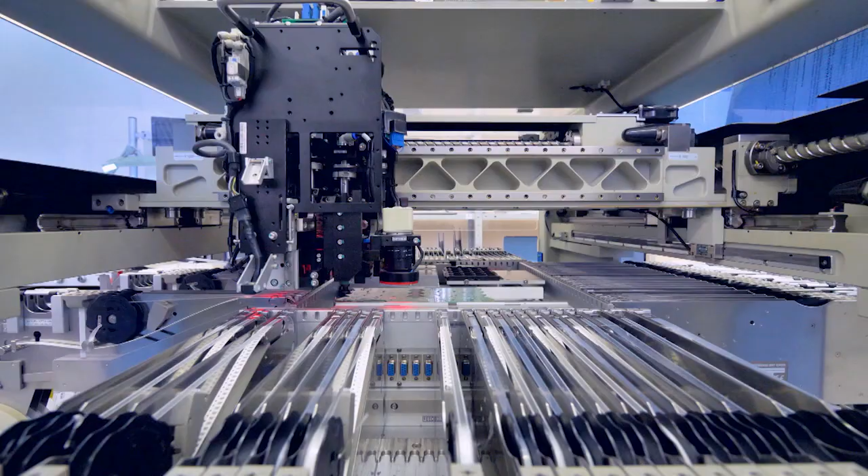Air compressors are those invisible things that you probably don't realize are in every walk of life, whether it's how we fill sodas into bottles, how we move and convey parts in factories and plants, how buildings are painted. It is truly a fourth utility. Most people think about electric and gas, but air is another utility just as vital in production processes, whether in pharmaceuticals, in food, putting chips in bags, or in industrial environments like we work in here at Sullair, building products for other companies.

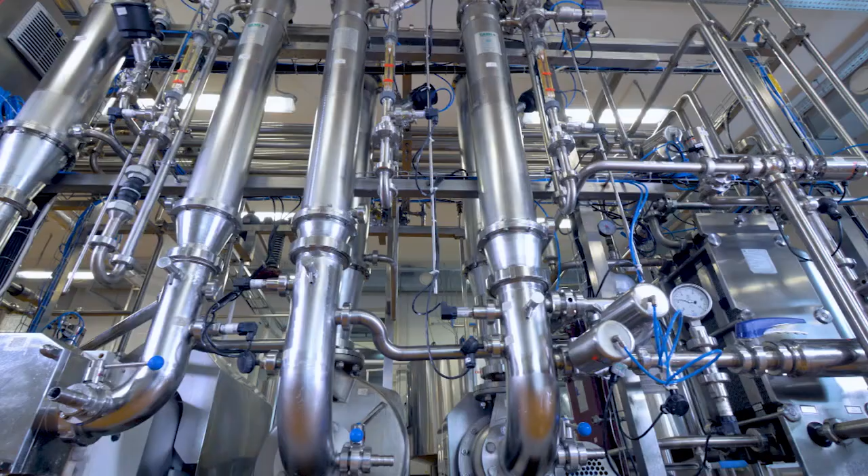In a factory, on a job site, or anywhere in need of clean air, there's a reason Sullair has been the leading edge of compressed air solutions for over 50 years. Been around for 53 years, since 1965. We make compressors, industrial compressors, both portable and stationary.

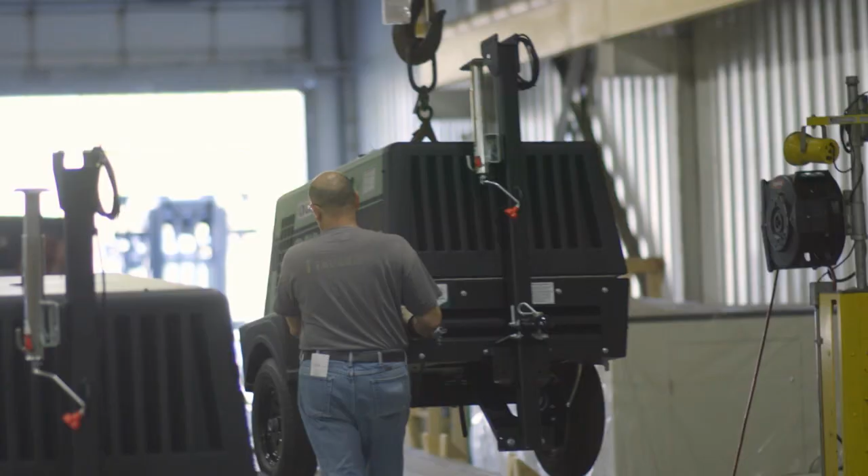We go beyond compressors. We make ancillary or tertiary products that complement the total solution package for compressed air for industrial and many other types of customers.

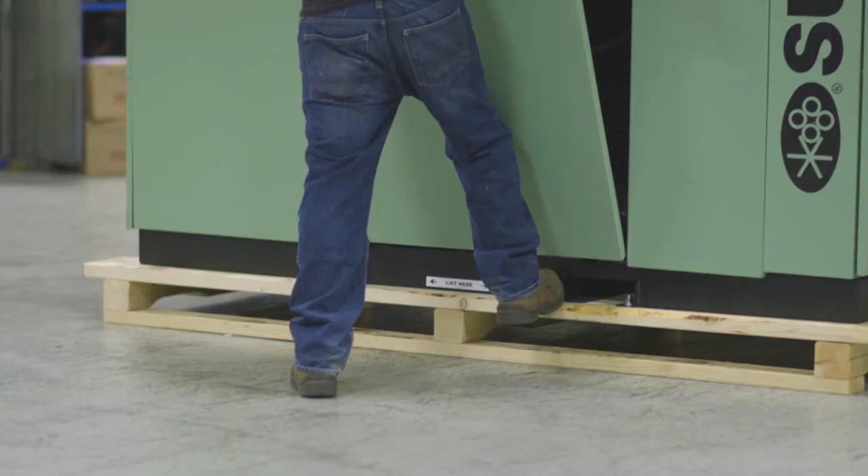Sullair, to be real honest, was for the past 8 to 10 years somewhat in a holding pattern, with uncertainty in terms of what the future might be. Throughout the industry, Sullair has commonly been known as being like your father's Oldsmobile. While renowned for its durability, it's no question Sullair was often seen as outdated manufacturers. That was until the acquisition by Hitachi in 2017.

I was actually on the team for this acquisition on the Hitachi side, and after the acquisition I was told that I was going to lead that business now. So we are thinking about how we can bring Hitachi's culture or Hitachi's strength into Sullair to bring this business into an even better direction.

Not only did we get a partner in Hitachi as an owner, but we got a great partner. Hitachi has come in, they're committed to this business. They are very strong in their own right in Japan. They are committing resources, technology. They have products we don't have in technology, we have some they don't have. But the commitment at the very top of Hitachi couldn't be stronger.

My goal for Sullair is - we actually just merged together and are still in the stage of bringing the best culture from each other right now. But the goal is that I want to, and I think both Hitachi and Sullair want to, become the number one player in the world, not just the USA, not just North America, or not just Japan. With the technology we bring into Sullair and Sullair's basic structure and strength we already have here, we can make it the number one company in the world.

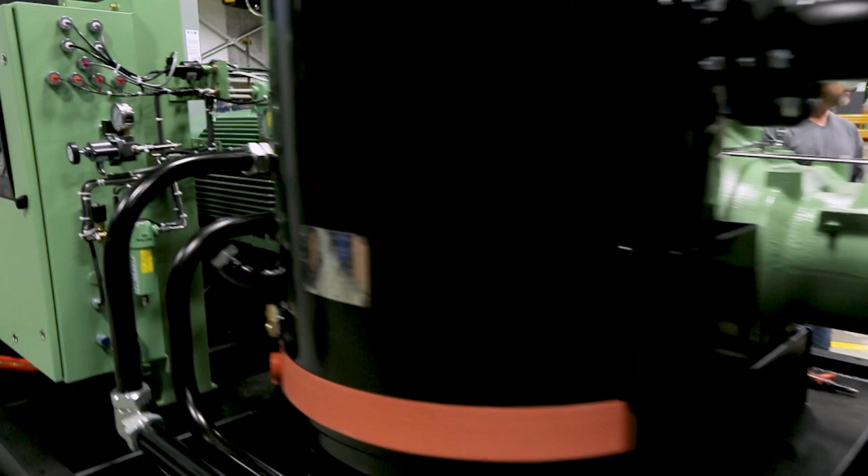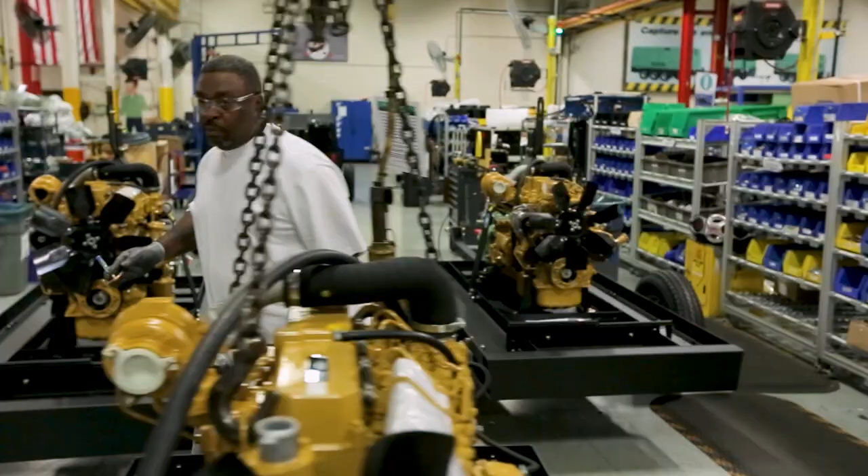Sullair is rapidly innovating due to the company's acquisition by Hitachi in 2017. From an engineering standpoint, since Sullair has been acquired by Hitachi, it's been like a new kid with a new set of tools, or a new toolbox. I've been able to look at not only the mathematical tools that Hitachi uses to compare and contrast, and then use the best of all the technologies to help further our development of new products.

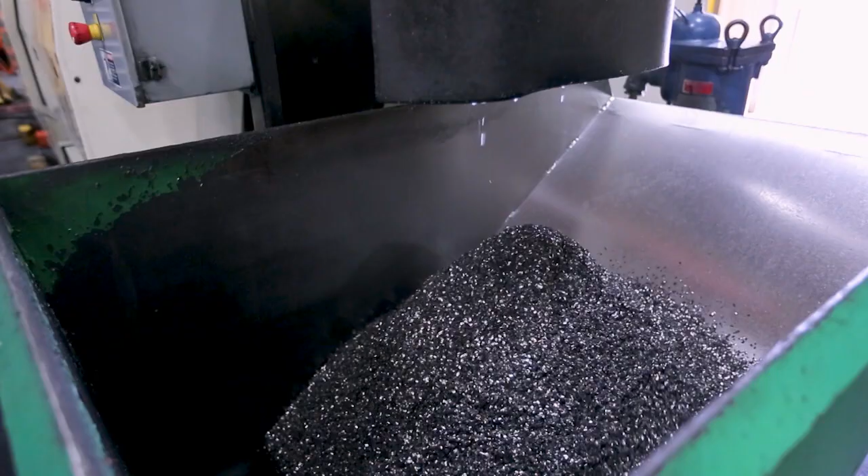We have access to Hitachi's leadership development programs for our employees, so we're starting to consider ways to send our employees through those programs.

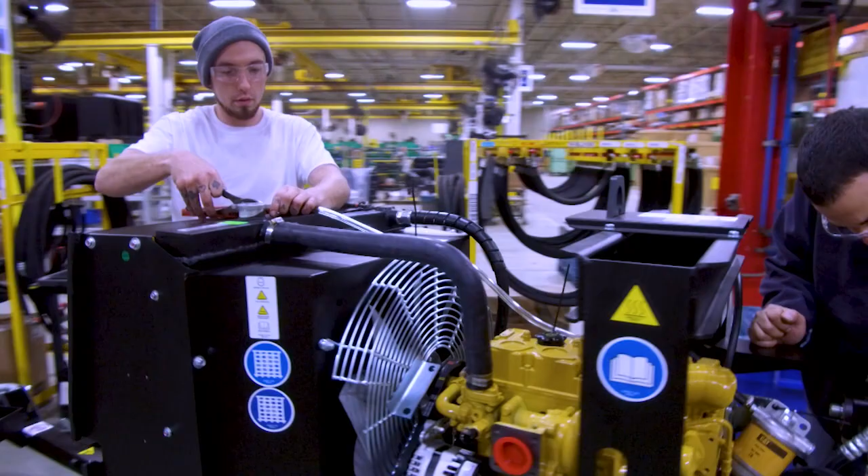Sullair is showing us why they're far from being old school, with their compressors at the heart of most manufacturing and industrial applications. Sullair air compressors are known for their durability and reliability. We have, and I have seen, compressors in customer sites that are over 30 years old. As long as they are well maintained and continued to be kept up well, they will last.

That is a hallmark that, from a development standpoint, we've ensured we have kept with all new products. So as we've brought out and maintained the DNA of Sullair, we've improved in other areas, such as the operator interface and performance aspects of how our compressors work.

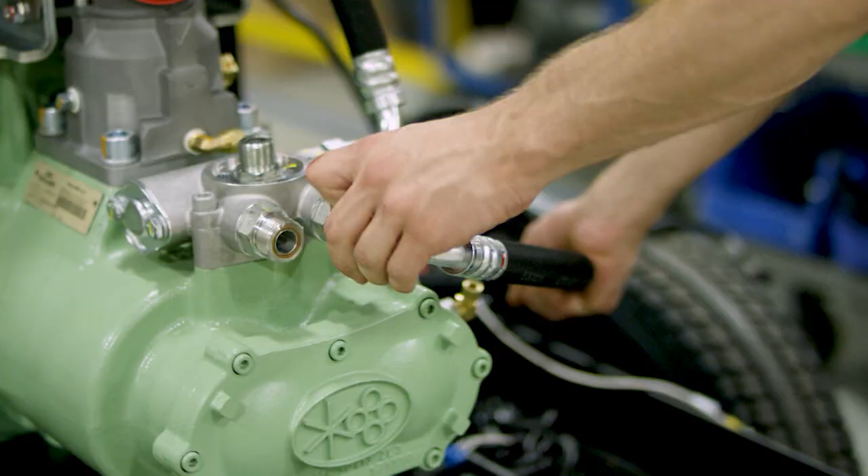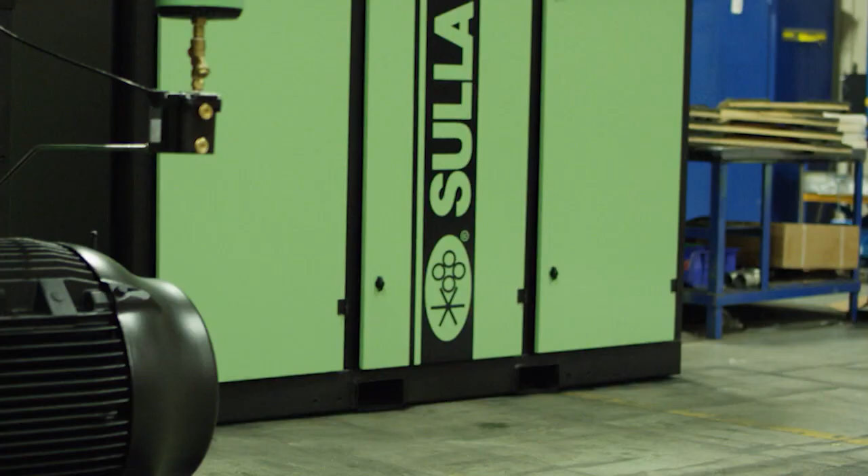Our mantra at Sullair is pretty simple. We pride ourselves on being reliable in terms of the products that we manufacture, durable, and providing very high-performance products as well, so that we can help industrial companies excel and do the jobs that they intend to do.

The resources they give us—there are over 300,000 people at Hitachi. I kind of feel like I've met all of them at some point in time, but there's a tremendous amount of resource that we didn't have, quite frankly. And the people themselves, I probably should have led with that.

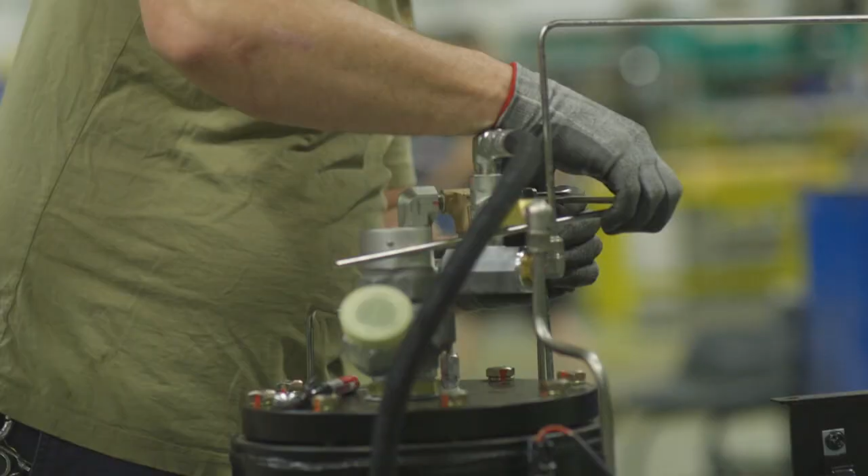The people at Hitachi are very genuine. They care, they want to help. So are Sullair. So it's a match really made in heaven, because there's just a tremendous amount of synergy and respect going both ways. And we try to help one another, even though we're small compared to Hitachi. Most companies are. We try to give back to Hitachi as well, but it's been a fantastic marriage. And the word I use is it's given Sullair a home.

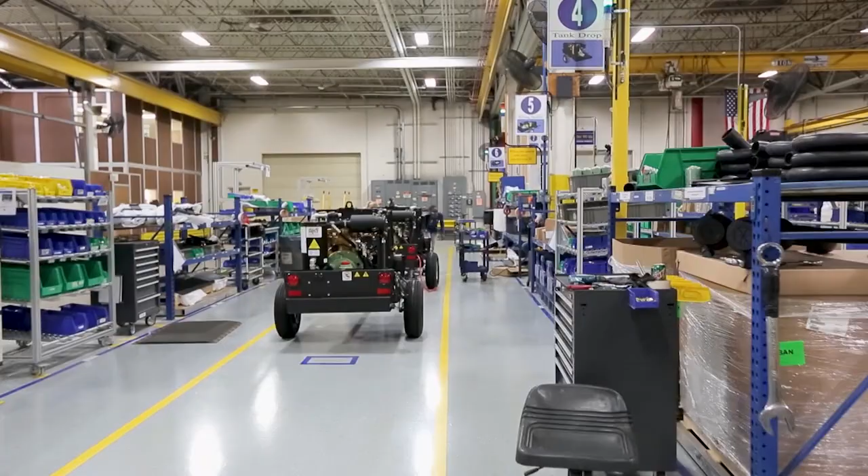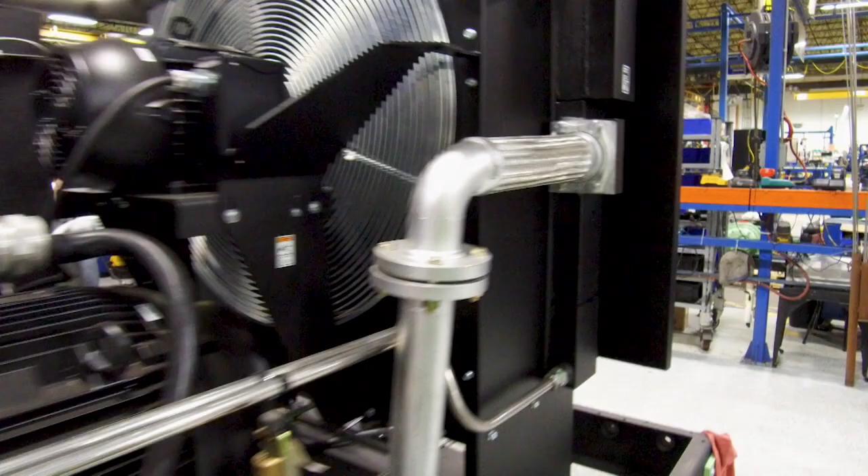In 2018, Sullair introduced and expanded two new major lines for both their stationary and portable air compressors. The biggest aspects we've been focusing on from a technology development standpoint are new air ends for our products. They are basically the heart of the compressor. They are what we are known for in terms of durability and reliability, and what we have done is improve that, making them the most efficient air ends in the market.

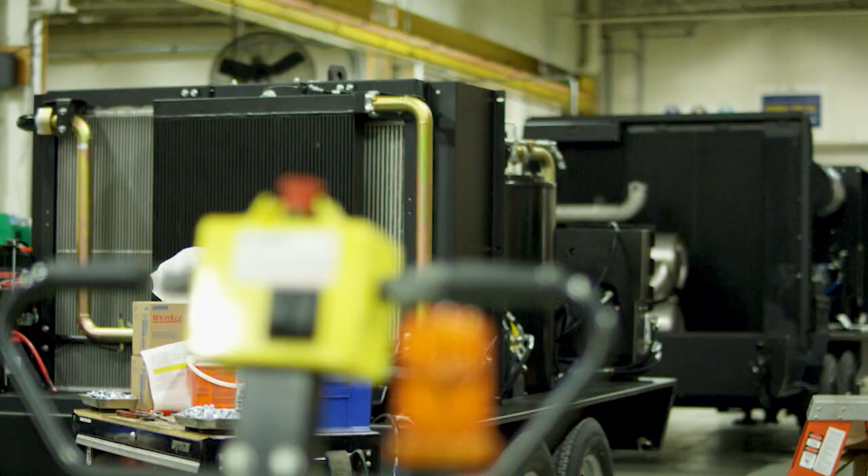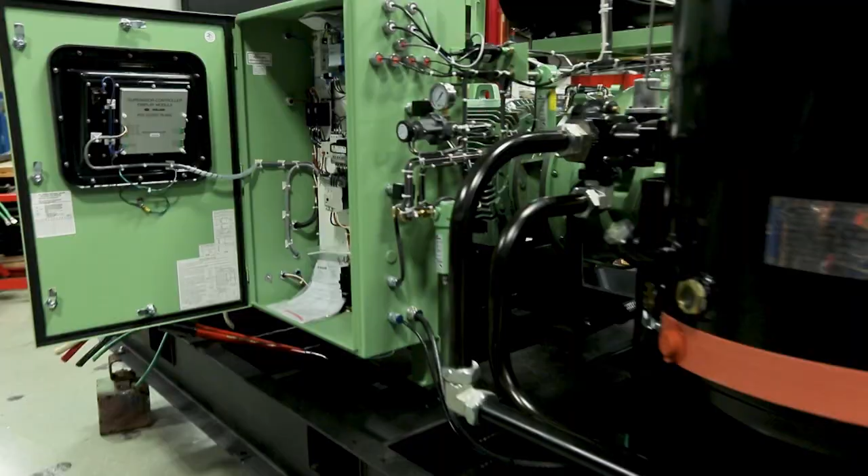Our new LS series product is the first all-new product launched in almost a decade. It has truly changed the perspective of Sullair from being a very traditional, old-school type product to putting us on the leading edge with new technology, allowing our products to lead in the market—continuing to find new ways to advance and incorporate innovative features at a rapid pace for a reliable and sustainable performance.

Sullair's product is known for reliability, durability, and performance. Famous throughout the world for their legendary durable products, Sullair has been on top of innovating air solutions year after year.

There's going to be growth here. We've added over a couple hundred people just this past year, and I think we could be stronger than we are today, and we're pretty strong now. But we have a balance between the little bit of catch-up that we're still doing—we're almost there—and growth, which we are accelerating at a record pace right now. And we're going to continue to do that for many years to come.

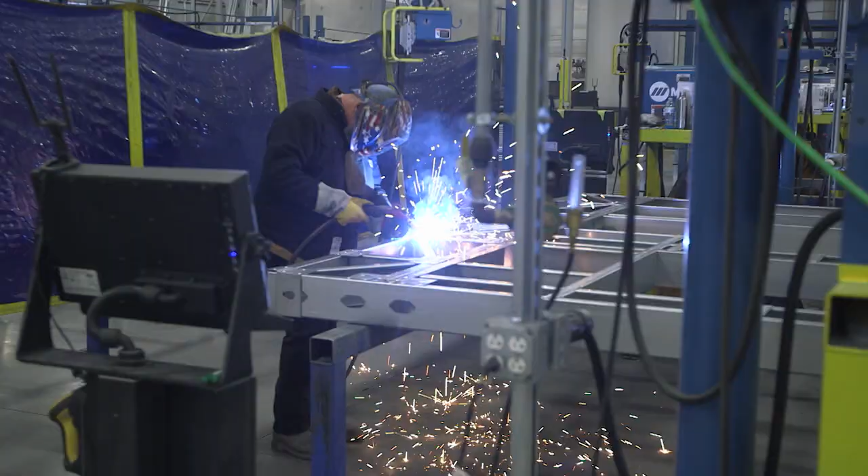On this episode of Inside the Blueprint, we're going to Durham, North Carolina to visit the facilities of Prescient. We're revealing new technology being used in the construction of multi-unit residential buildings.

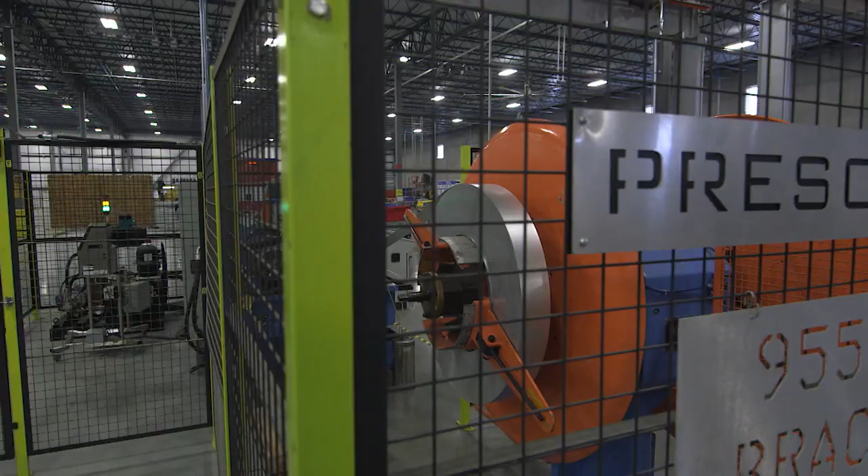Prescient was started with a very small facility—it was a 6,000-square-foot garage. Today, when you put that in perspective, we have two manufacturing plants, each 130,000 square feet. What's most exciting about our company is that we're in a $10 trillion industry that is ripe for disruption. We built an end-to-end platform, which is a proprietary system, both software and hardware, that really solves all of the bane of construction.

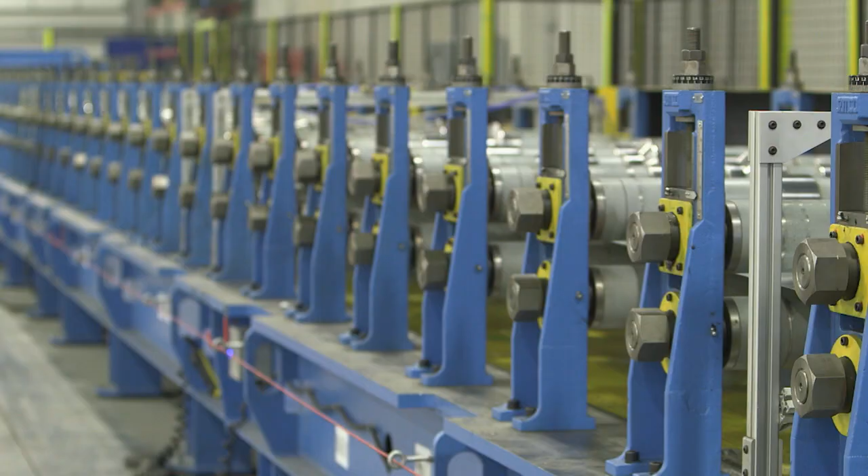Prescient is using state-of-the-art technology and advanced manufacturing methods to revolutionize the way multifamily residences are planned, designed, and built. Here we actually produce all of the different elements of our UTSCS system—posts, panels, trusses, and our metal decking system that are produced on site, as well as our stairs, which is our newest product line.

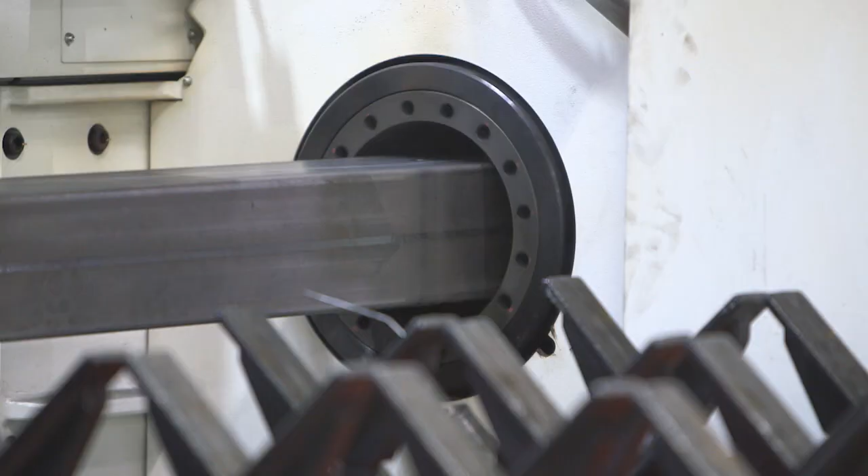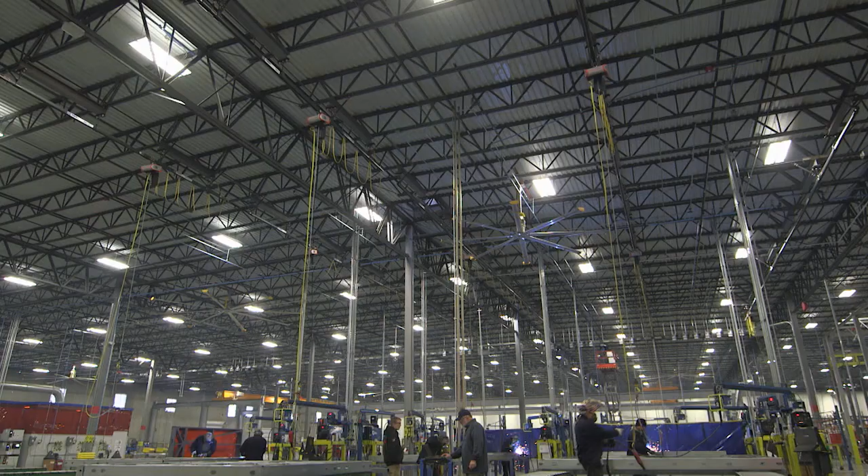The Prescient digital thread is based on a model-centric design and planning platform that liberates project stakeholders to plan better and execute better. As a result of this technology, the process becomes an orderly progression through a repeatable flow. This seamless approach means higher productivity, higher quality, fewer last-minute conflicts on site, less waste, shorter schedules, and a better ROI.

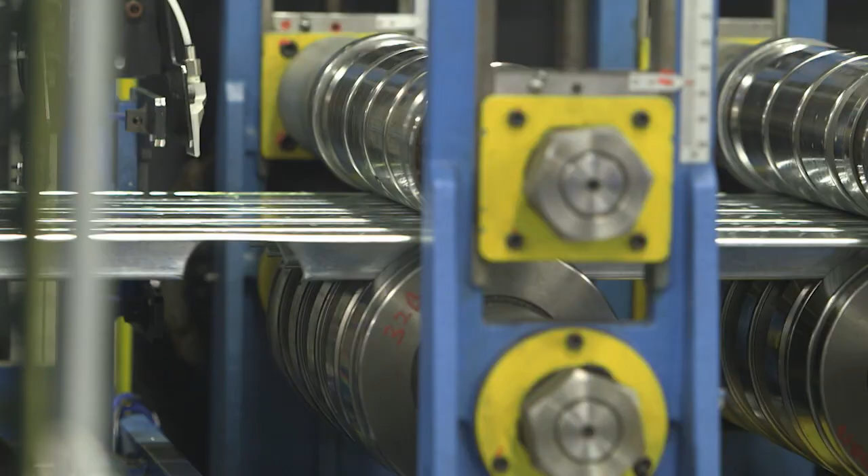For Prescient, the vision is pretty expansive—it's attainable housing for all. Our technology and our product is applicable globally, across all continents. With the increasing thrust towards urbanization, we are the perfect urban infill solution.

One-third of our company is pure software development. One-third of the company is advanced manufacturing. One-third is where the rubber meets the road, where we handle the construction part of it, where we assemble our buildings.

Prescient is a technology and manufacturing company that offers a faster, greener, and more cost-effective alternative to conventional building structures such as apartments, student housing, and hotels. We visit one of the current sites utilizing this technology.

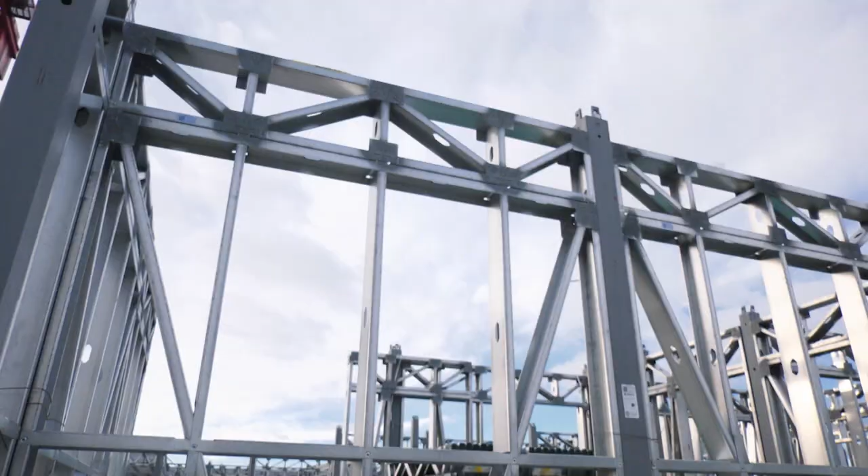We're at the Jefferson View Apartments, a 248-unit apartment project here in Denver. What you see around us is the Prescient framing system, a construction method that allows this project to go a lot higher than wood construction, but it's also a lot more economical and affordable than concrete.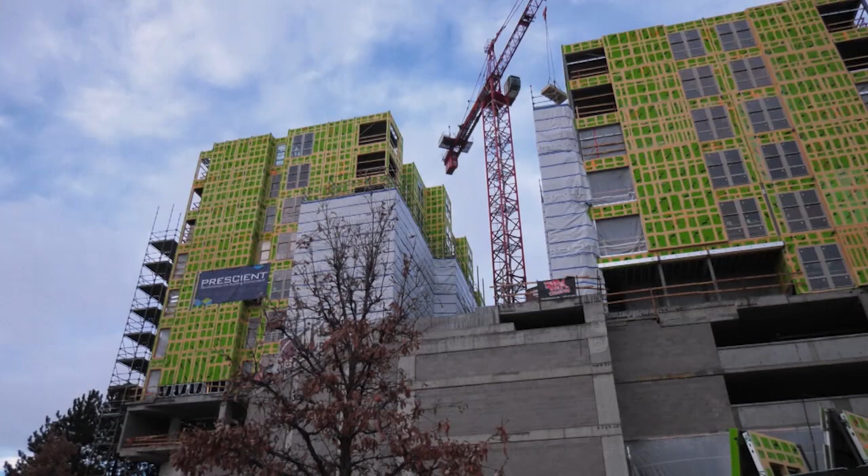This site is less than an acre. In order to get critical mass, we had to go higher than what stick frame allows, which is only 5 stories. So in order to go 12 stories, we needed to go light gauge steel, which is more cost effective than concrete. So Prescient allowed us to do that.

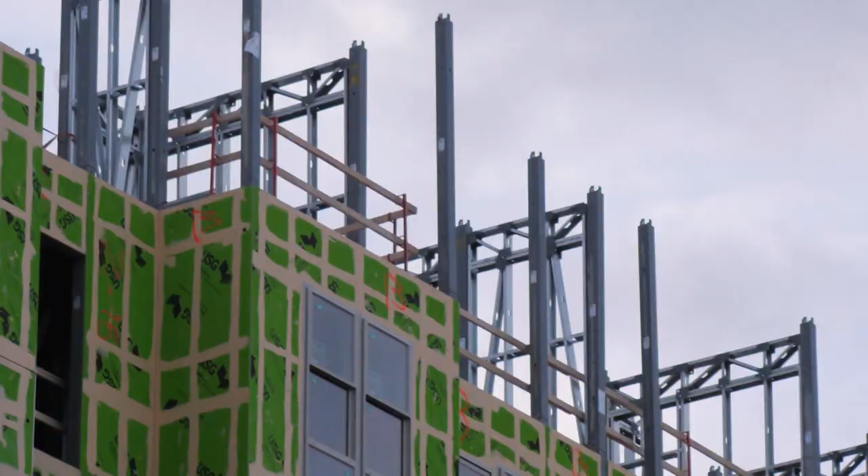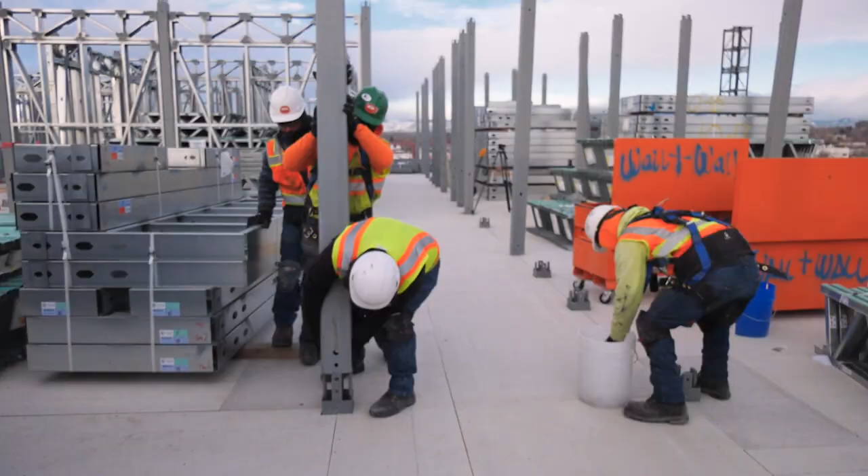In addition, with Prescient, we were able to get several points towards our green designation in order to get a green building certification. And then lastly, the Prescient system allowed us to condense our schedule substantially versus other forms of construction, say concrete or stick frame.

We're building the framing system off-site so that we can speed up the construction that happens on-site. So what happens is we have the ability to move faster to complete the project because of the off-site prefabrication.

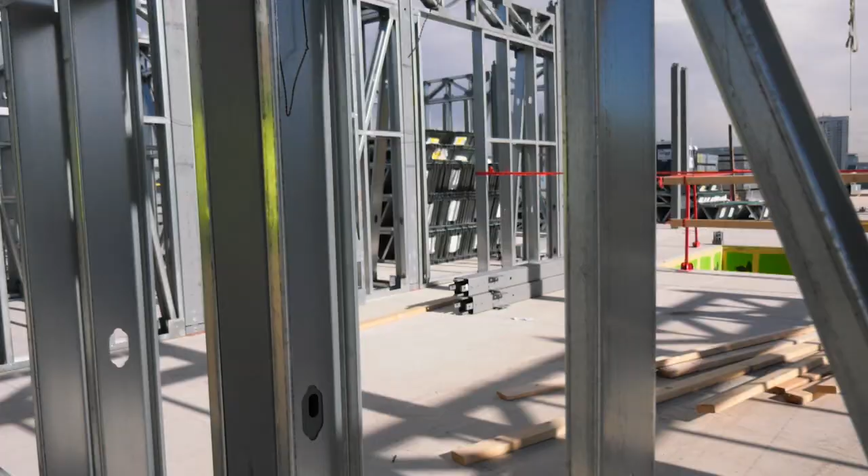The impact of Prescient, in my mind, is that one of the most important things it does is help narrow our carbon footprint. Construction is an industry that gobbles up carbon, and we need to be doing our part to make that better. Prescient and what we're doing here can help a need that's going to affect my grandchildren and their children.

So we're here on the 9th floor of the Prescient system, and what we've done first is install our posts. Each one has its own QR code. When we made this at the factory, we knew exactly where this post was going to go in. We put the posts in first, and then next come the panels, and then the trusses.

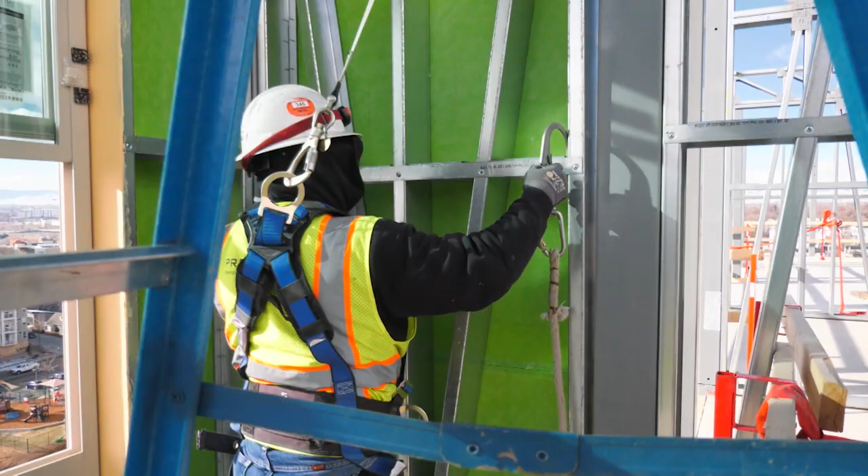What you'll notice is that the panels and the trusses are right next to the posts where they're going to be assembled. They're all barcoded as well, so that assembly happens very fast, and no construction worker ever has to move more than 20 feet from where the inventory is laid.

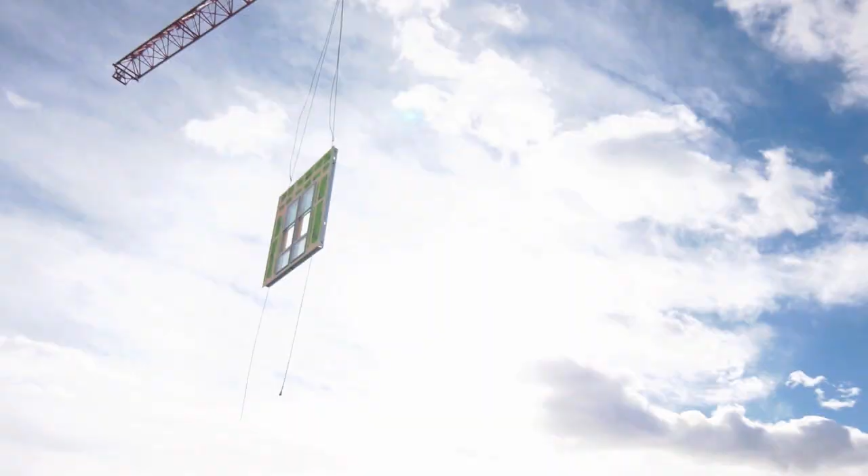The strength, stability, and precision from using these advanced manufacturing methods enables Prescient's digital thread software to provide a singular source of truth for all stakeholders on the project. This comprehensive building solution significantly reduces costs, execution risk, and time from development to completion, providing economic benefits to all constituents in the process.

We'd like to build this thing into a global brand. We'd want people to be able to walk by our buildings and say, that's a Prescient building. We are the guts of the building. We are the only OEM platform in the world today, and we would like to globalize this brand in hundreds of cities around the world.

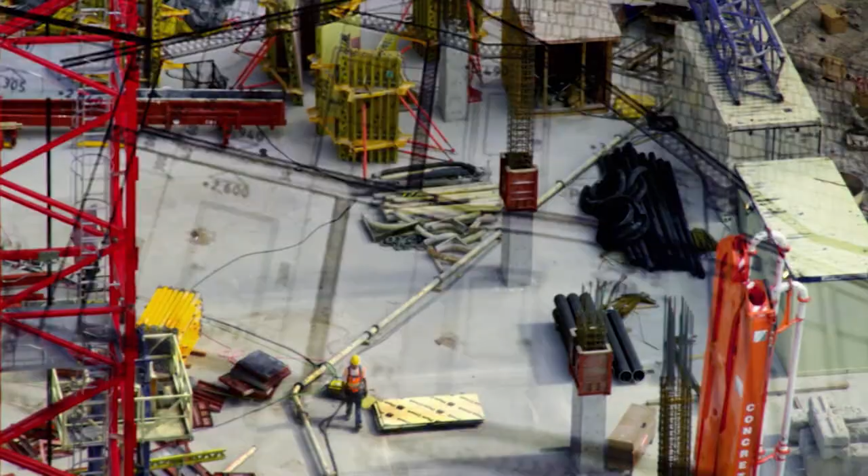We are in Hagerstown, Maryland, visiting the headquarters of JLG Industries, celebrating its 50th anniversary this year. JLG is dedicated to creating a better way to work at height. JLG is the world's leader in the design and manufacture of access equipment. We make all kinds of construction equipment which keep people safe and productive at height.

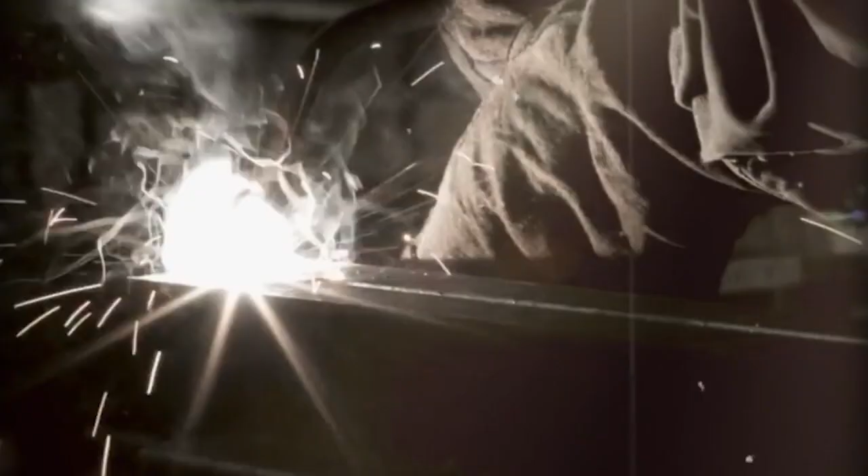Formed in 1969, JLG pioneered the access industry from its early beginnings by manufacturing the first aerial work platform. John L. Grove founded the company in a little mountain community called McConnellsburg in 1969 with just himself and 3 small investors. They would soon transform the construction equipment industry with the introduction of the world's first aerial work platform.

He was passionate about innovation, passionate about keeping people safe, and since then the company has grown to now over 6,000 people. He was all about understanding the unmet needs of the customers.

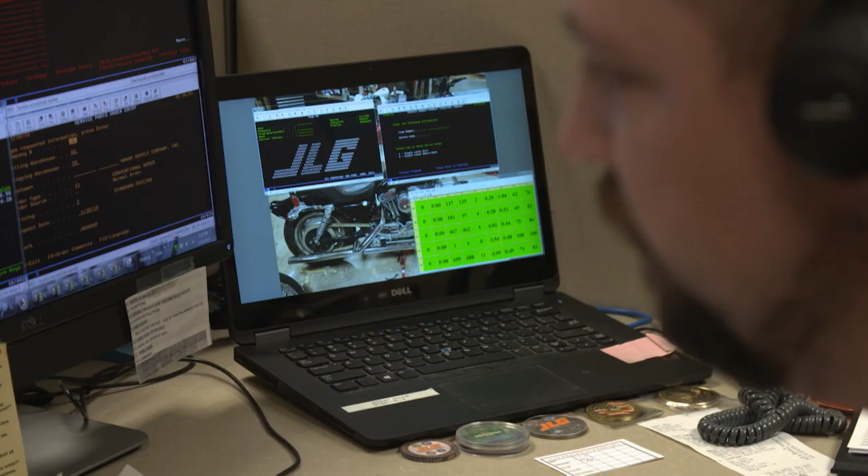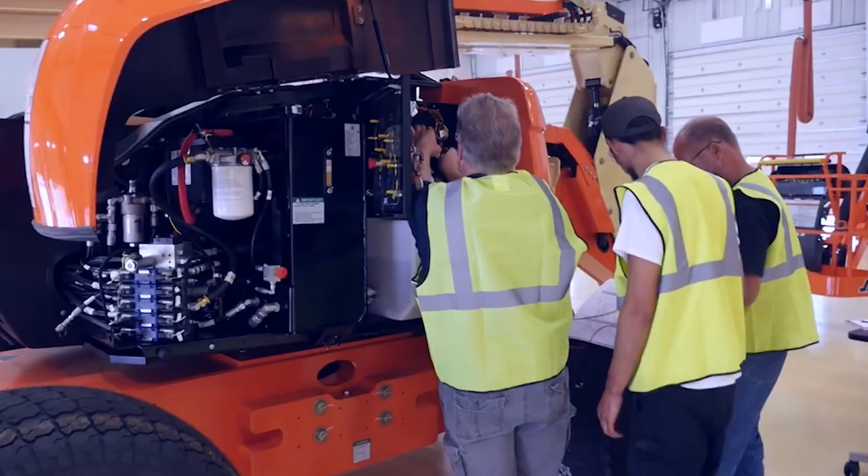One of the secrets of JLG's success is that they focus on customer first and foremost. The customer is at the center of how we think about all problems when it comes to developing products. It's about making sure that they have the right training tools to use the product effectively. So all those things are key to our innovation process, what we again call customer-inspired innovation.

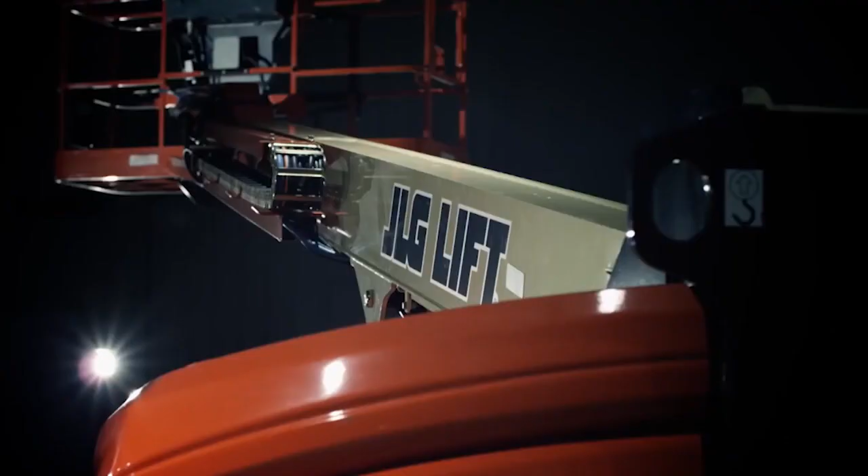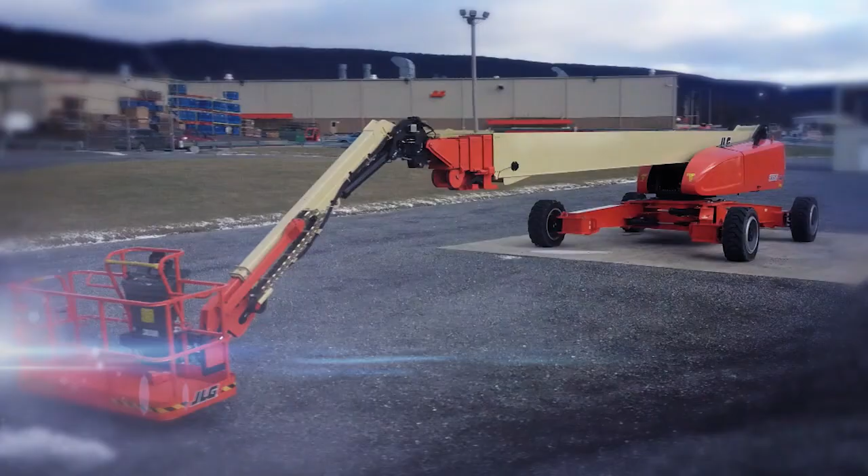We are confident that that's going to allow us to remain number 1 market leader in this space for the next 50 years. A spirit of pioneering that has constantly pushed the boundaries in the access industry. As an example, the 1850 SJ was introduced in 2014 and remains the largest self-propelled boom lift in the world.

We've been first in the industry in aerial work platforms, but that's not all that we do. We now have a full line of electric scissor lifts, hydraulic scissor lifts, telescopic material handlers, and verticals. And most recently, we're introducing a line of low-level access, which we believe will be a safer alternative to the conventional ladder.

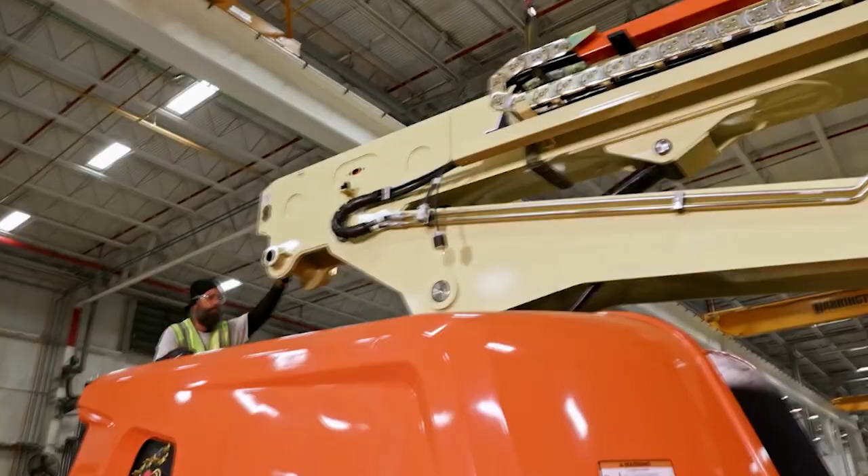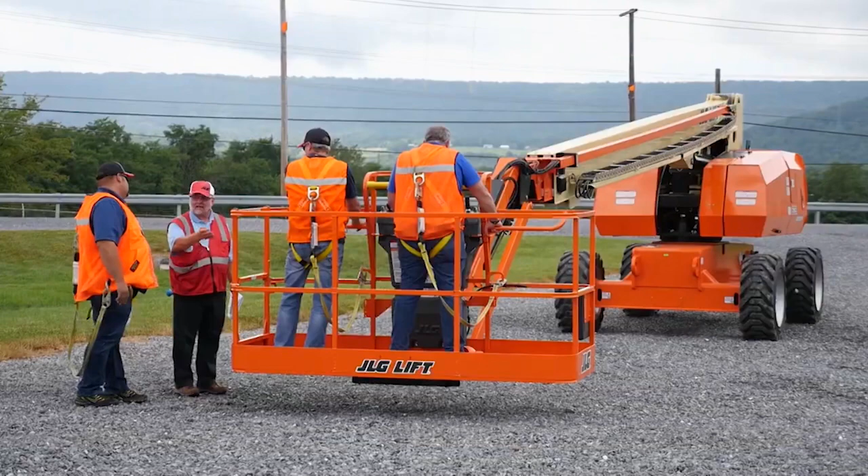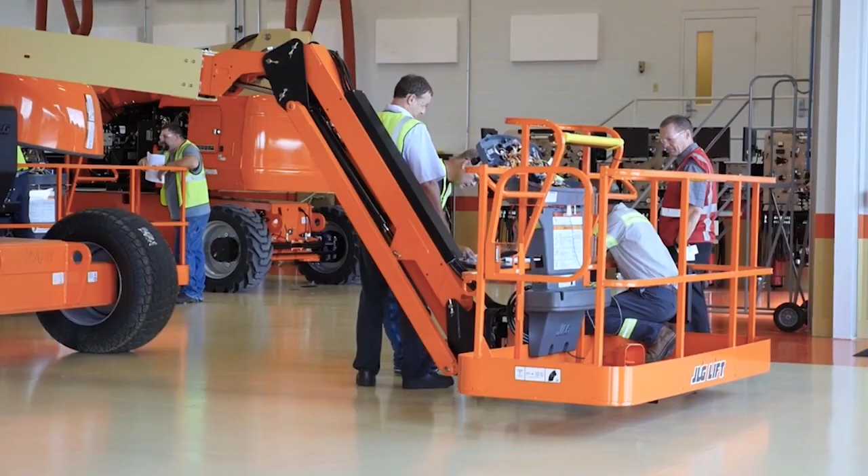We're now in McConnellsburg, Pennsylvania, where JLG University offers training for operators on how the equipment works and how it can keep them safe. We have the operator training, which is train the trainer, and how do we operate the machines. And then the service training is how do any of these machines work. The training center really provides hands-on for those trainers that want to come in.

The more people we can train in this industry by whatever means makes the industry safer and stronger. We offer all kinds of courses online, and increasingly we are offering those courses in a virtual reality or augmented reality setting that allows our operators to learn at their own pace. We were the first of the industry with this type of training, but the people get in the virtual reality and they operate the machine just as if they were in a construction site. It's a powerful training tool that I think is really the future.

JLG University offers Access Ready as part of its Train the Trainer program. It's another innovation, really, where Access Ready is a portal for operators to get training, and then they can join on that website, and it advertises their ability to train operators for the world.

JLG is a global company with offices on 5 different continents. Part of this success is due to a nature of innovation and excellence in the manufacturing of their products. Today, we have factories around the world employing over 6,000 people, so we are really a truly global company serving our global customers.

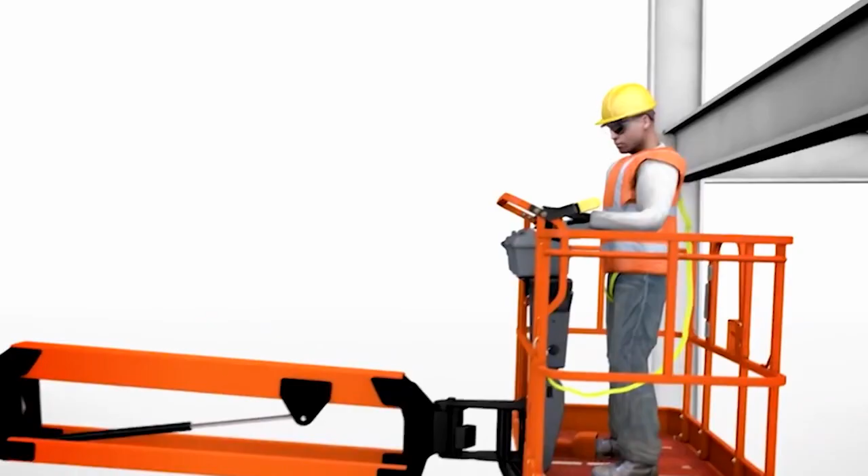We continue to look for ways to leverage connected machines and IoT, one of which is the iPhone, that we now can control the scissors remotely. JLG was the first in the industry to offer a SkyGuard solution, which allows people to work at height, and when they come in contact with an obstacle, the SkyGuard function allows for reversing of the machine. So we'll continue to add more and more products that will increase the safety of our machines.

Having started as an industry pioneer, on its 50th anniversary, JLG Industries remains a leader thanks to a culture of innovation. We listen to our customers, we understand what their struggles are, what their unmet needs are, and that really motivates us and inspires us to develop solutions for them to keep them safe and keep them productive. Business, success, and the safety of our customers remain our number one priority.

And one thing I can tell you for sure is that you will always see JLG at the forefront of access innovation.

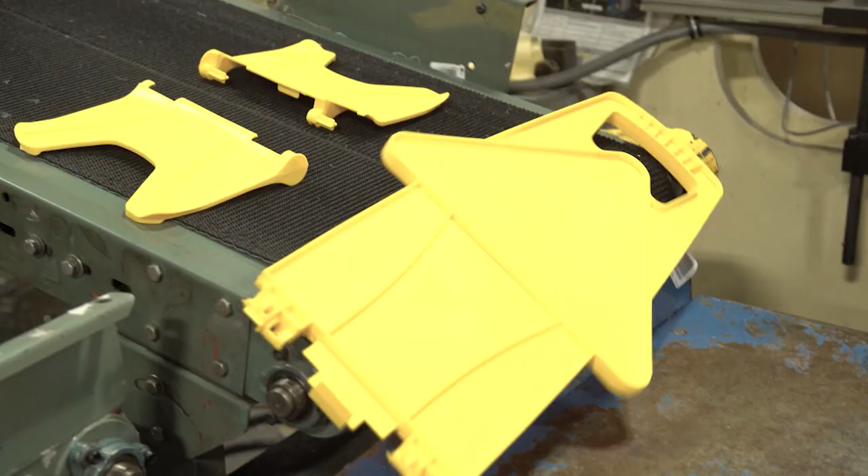RCP, better known as Rubbermaid Commercial Products, has been designing and manufacturing the most effective and durable commercial sanitation products since 1968. From trash containers to a mop bucket that reduces splashing, durability and productivity have worked as key ingredients in the innovation behind the product's design. We're heading to Rubbermaid's headquarters in Huntersville, North Carolina, to meet the team behind the world's toughest cleaning products.

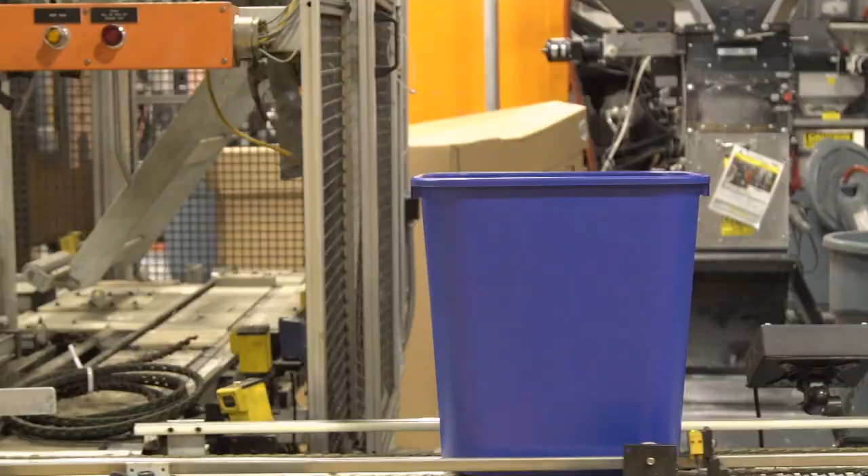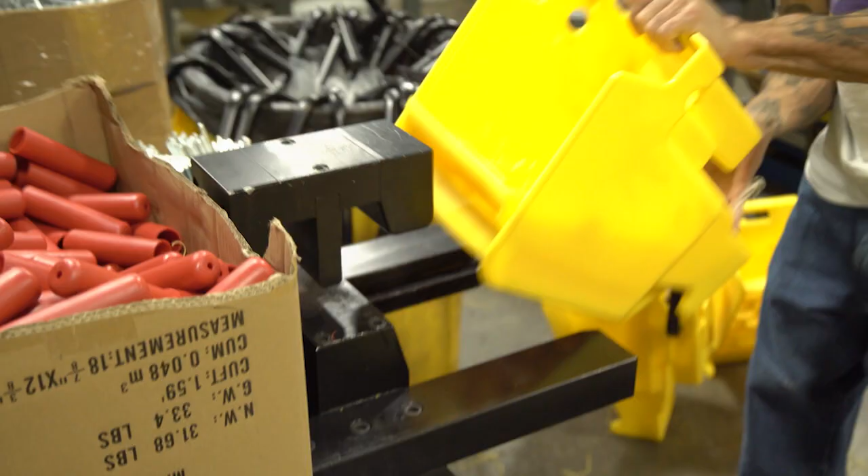When I think about quality, I think about it from our consumer's perspective. And when you just see the name Rubbermaid, what initially pops in their mind is the word durability. We have a storied history of innovative product design. In 1974, RCP came up with the first resin mop bucket. At that time, the advantages of that over the traditional metal bucket were that it's a lot lighter and it's a lot more maneuverable when you push it across the floor.

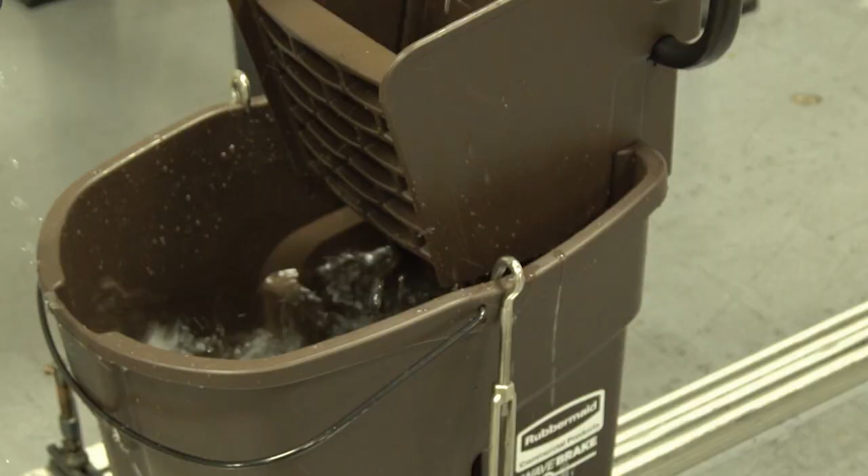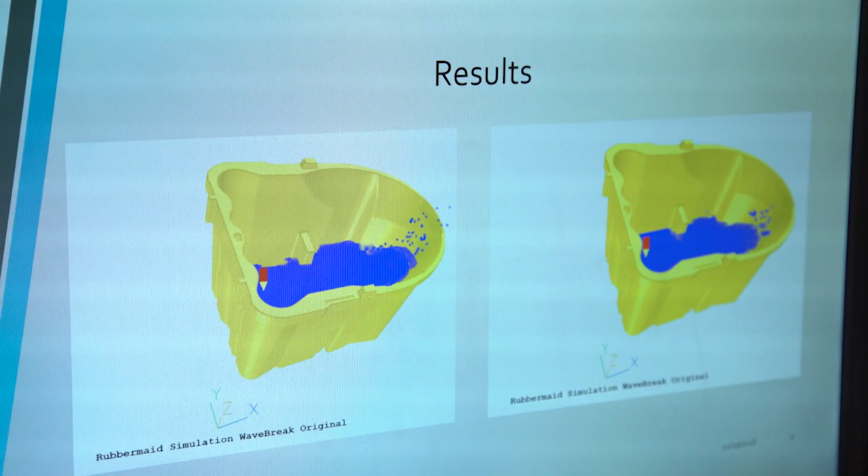So we put a lot of time up front in simulating how we're going to ensure the product quality before the design is even finished. We do it in our computer-aided design simulation tools. We're also taking our product and go evaluate it in the test lab to make sure it meets all the standards, and then we get approval by quality to go into production.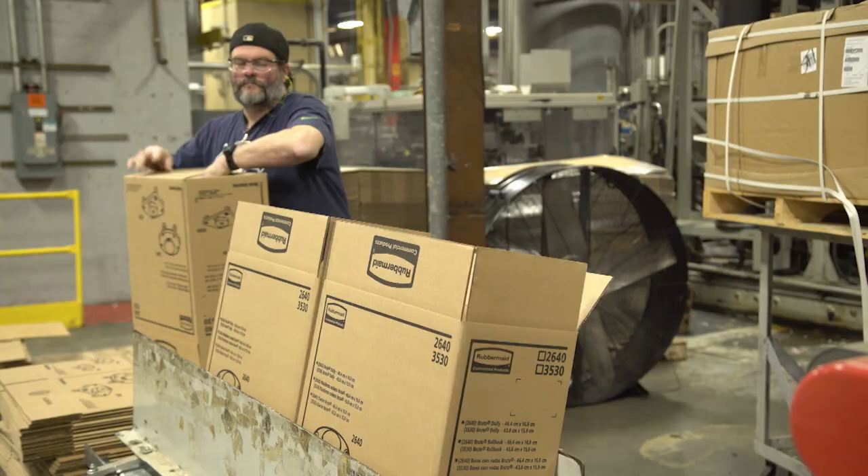So what is it about these innovative designs that keeps RCP at the top of the industry? We're always trying to find ways to test our extreme durability. So recently, my team came up with this crazy idea to drop a 4,000-pound car on top of a Brute container, just to see how indestructible it actually is. And of course, there was some crushing, but no denting, and it literally just popped back into its original shape.

Now that we've had a taste of the imagination behind these superhero products, it's time to see what they're made of.

Welcome to Winchester, Virginia, the original birthplace of Rubbermaid products. This is home to RCP's manufacturing and distribution, along with several other locations spread all over the U.S., totaling a whopping 3.9 million square feet of manufacturing space.

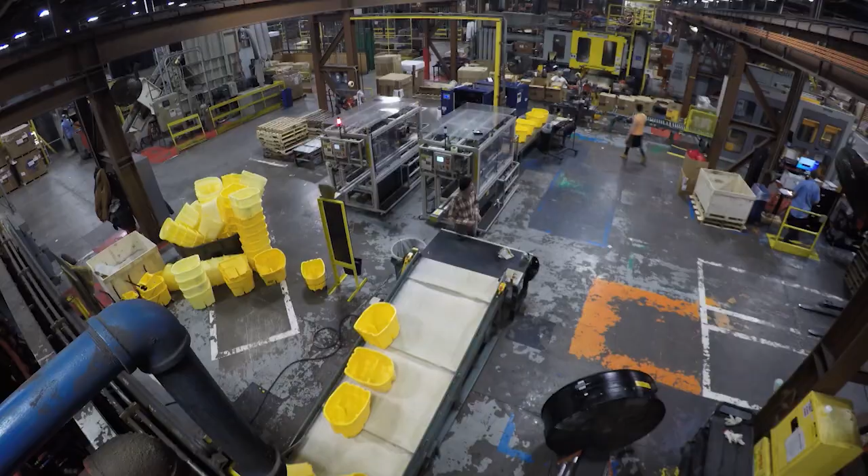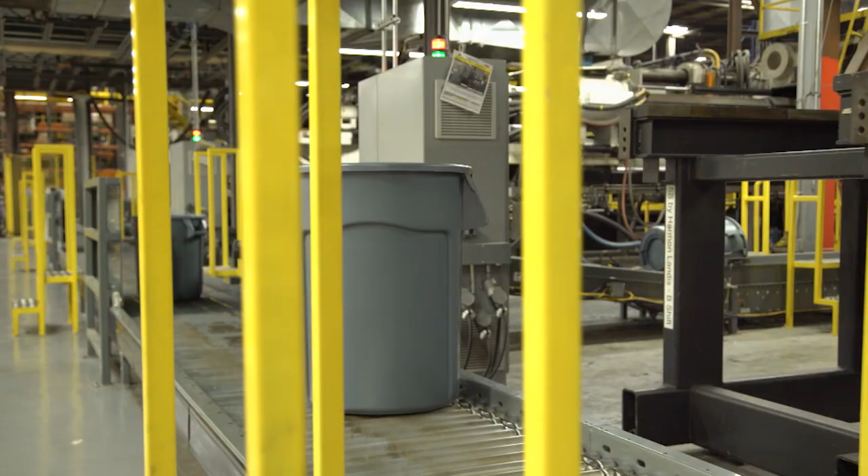In this facility, we've broken it down into several different product families. Two product families I'm really excited about are the Brute and the WaveBrake. The Brute, we make several different size containers. These are cans you probably have at your house, or your neighbor has at theirs, where they put their garbage in. So let's go take a look at the process in person.

Right now we're going to meet Bill Sharrier. Bill is my engineering manager for this facility. He's going to take you through the rest of the process on how the Brute is manufactured here. Bill, she's all yours. All right, thank you very much. Welcome to the Brute cell. Let's go take a look at the injection process and see how the Brutes are made.

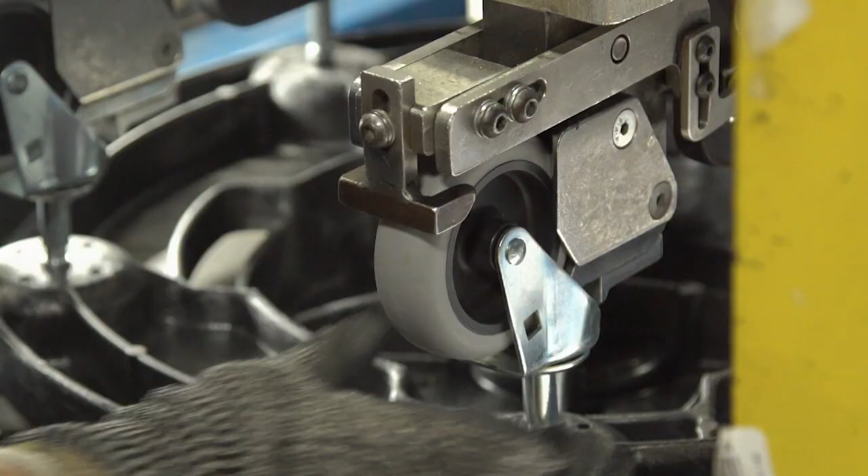Each year we go through about 130 million pounds of resin. It's delivered here by rail car, pumped into outside silos, and a pumping system conveys it to machines like the ones behind me. An injection machine has two halves: an injection half that has the screw and barrel. Resin comes in pelletized form, goes in, and gets pushed forward through the screw inside the barrel.

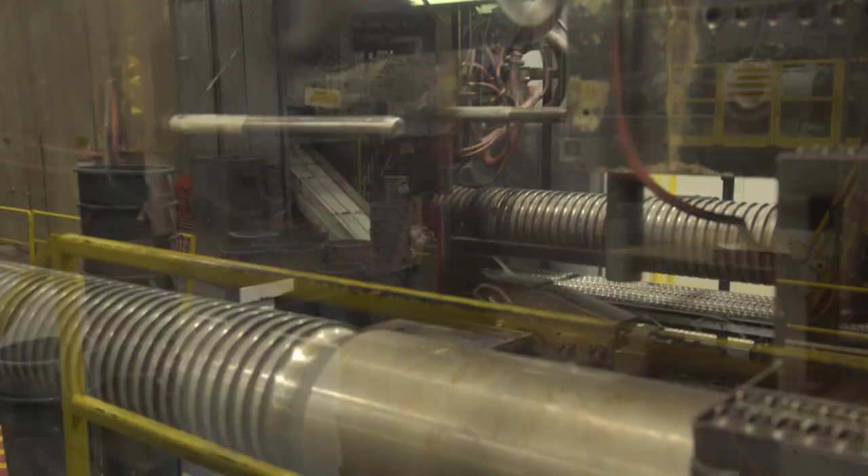It melts, and on this machine there's a mold in the clamp half that has two halves. It fills the void between the two—that's the shape of a 44-gallon Brute. It cools, and when it's ready and solid, it opens up. Here, one comes out every 49 seconds or so.

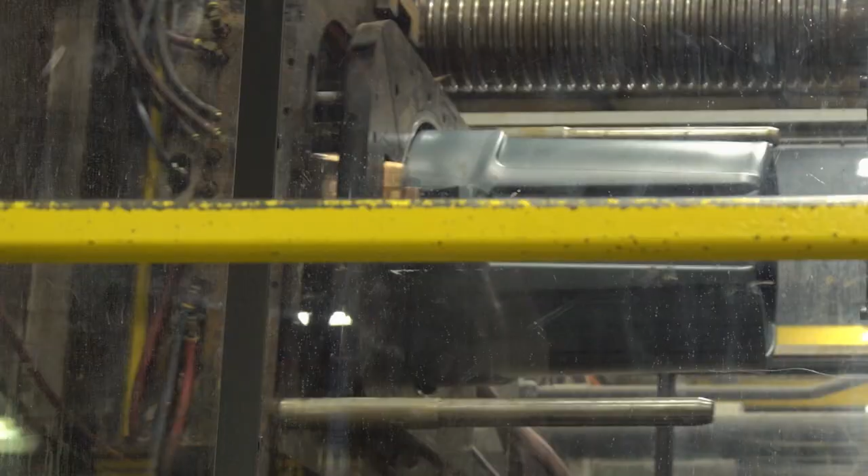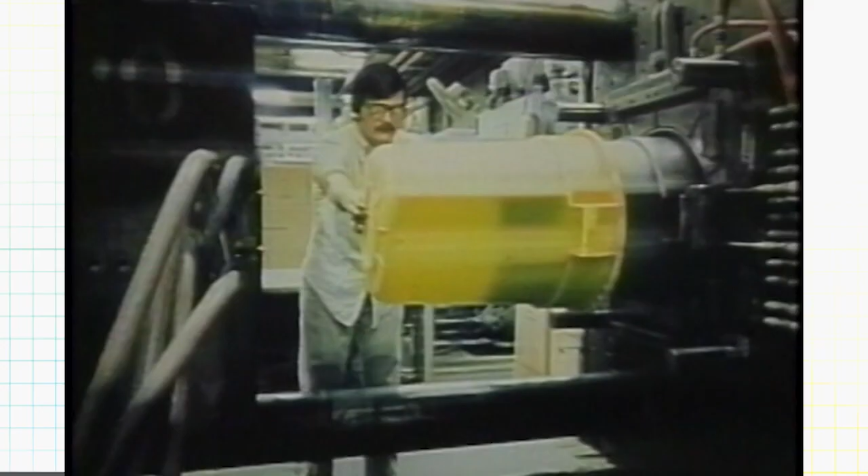For our 50th anniversary, we actually held a contest to find the oldest Brute still out there in the field in use. Within two weeks we had hundreds of entries, and we found the winner—someone who had a Brute container still in use from 1968, so 49 years and still going strong.

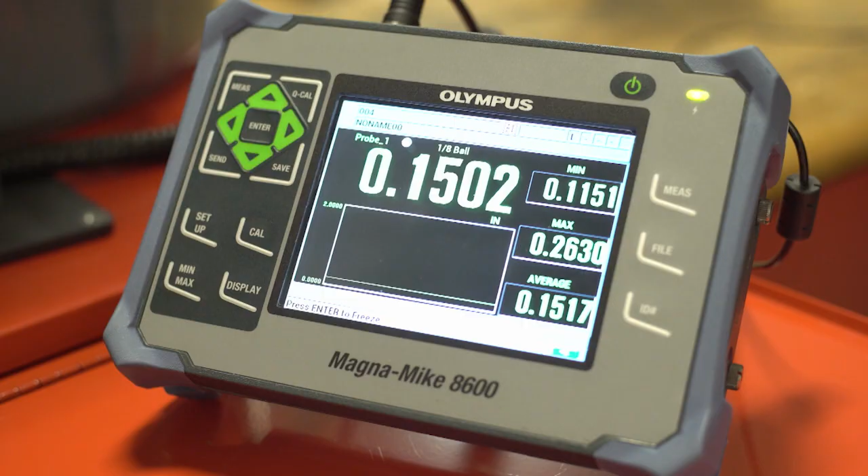It's amazing that we sell 2.8 million of these a year because they are virtually indestructible. They go through a variety of testing that takes them to the extremes of environment. We test them literally by freezing these things at minus 20 degrees Fahrenheit and dropping them from a height of 6 feet, 100 times.

We also lift them 5,000 times by the handles with a weight full of water. We put weight inside of them and drag them on a piece of sandpaper for 10 miles or so, just to show that they don't wear out as you drag it to the end of your driveway each morning.

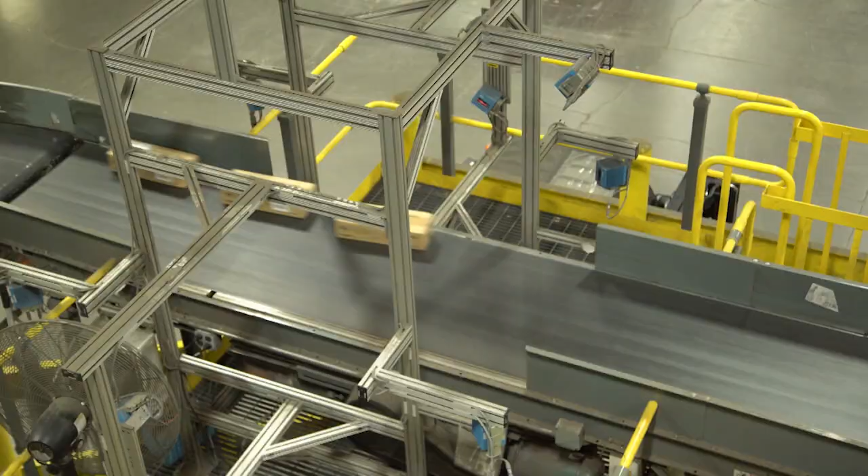So here we are at our distribution facility in Winchester, and behind me you see bustling activity, shipping millions of dollars of product each day to customers around the world. You name it, you can find our product in airports, hotels, and your kitchen as well.

I was in a hotel recently and saw a 95-pound housekeeper with a Rubbermaid Commercial Products hospitality cart. It really hit me that what we're doing can make a difference. On a daily basis, she's pushing over 350 pounds of supplies, 7 to 8 hours a day. And I think about the improvements we've made to that cart, even in the last two years. To us, if we've done that right, we've done our job.

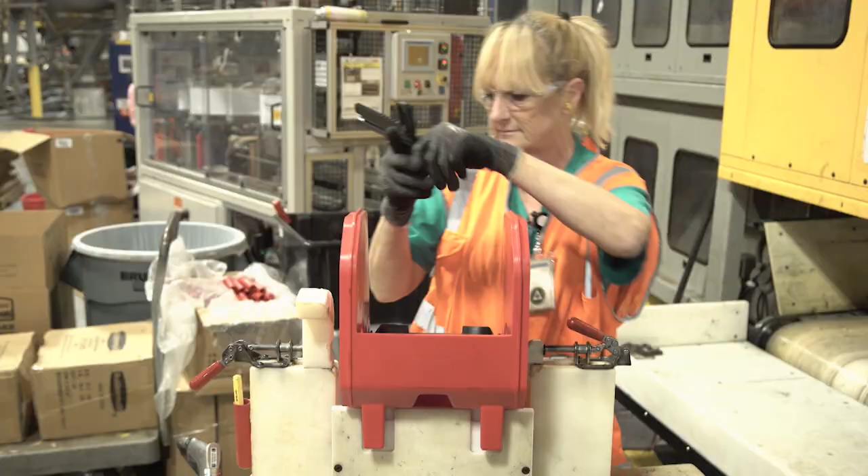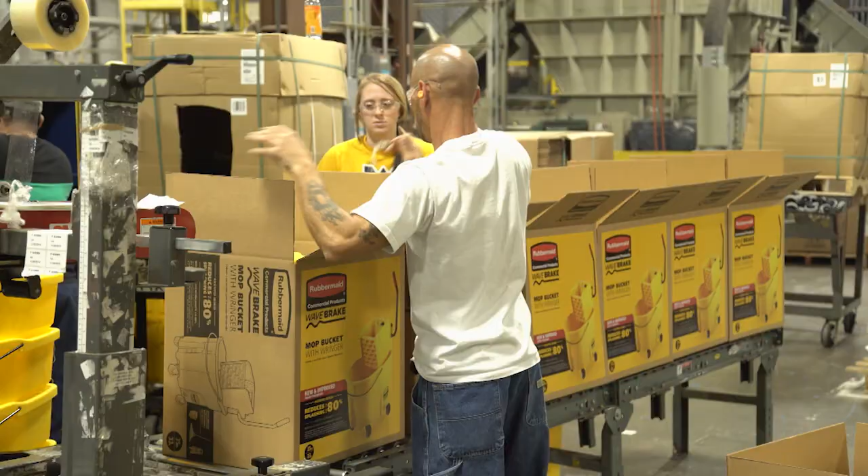We really want to make the users of our products' lives easier and safer—from mop buckets you'll see in a school cafeteria, to cleaning carts you'll see in a hotel, to BRUTE trash cans you'll see on a construction site. So when we build products and innovate, we think about how they're going to be used and design that into our products. We're also very proud that we're making so much of this product here in the United States, which benefits the local economy and the economy throughout the United States.